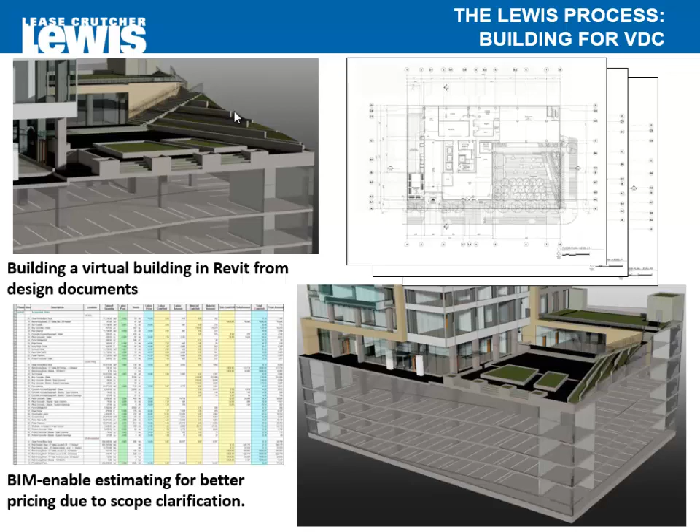But remodeling isn't lean. We don't want to have to remodel. So we want to engage the architect, and we want to engage the architect very early. I know you're all sitting out there going, oh, please, I don't want the contractor in talking to me in SD. Guess what? We really do want to be there early on. We want to be able to talk to you and say, hey, can we influence how you're going to model things? Because if we can influence how you model things, we have a collaborative environment right out the get-go. From that collaborative environment, maybe we can have you just draw your columns from floor to floor instead of from footing to roof. That makes a big difference for us in our quantities. So we ask, can you do that for us? It might be no, that's fine, but we're going to ask.

So the next thing that we do is, okay, you say no. Well then my next question to you is, can I embed my Revit schedules from Lewis in your model? Now what I'm going to do is ask for maybe 5 of these schedules. These schedules will have our shared parameters and Revit's parameters and calculated values that we find critical when we're putting our numbers together. That's why we want to work with you. And if you think about it, engaging us early doesn't hurt your process. And we're not taking over your process. I want to make that clear. We're simply working with you in that level of design development. So you're in 200, we want to work with you to get that up to 300. We want to work with you to bring that up into 400.

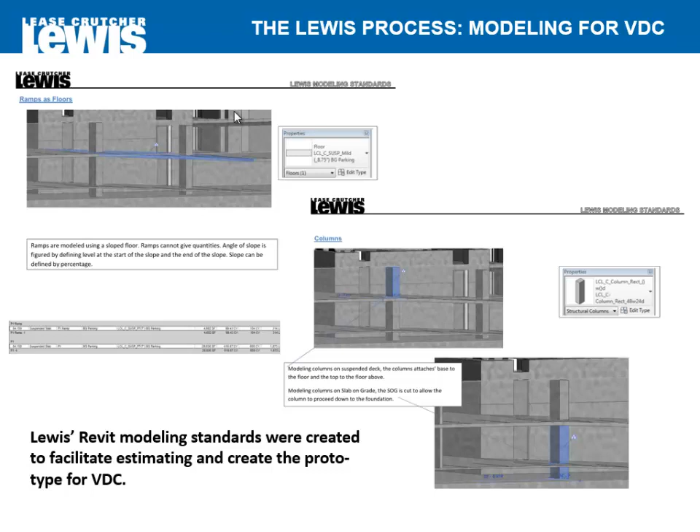And if you think about it, technically we've never built a building from construction documents. Anyone shocked from that comment? You shouldn't be. We build from the RFIs and the ASIs and the construction documents. So now the model, if it captures all that, you've got everything right there. So the next thing is, if you're not modeling, we model things that aren't even in our scope. Why would a contractor who does self-perform concrete work draw rebar? We find it critical that if we can put the rebar in there, we know it fits. We have better confidence that that element that we put in there is correct. We build it, we put the parametric parameters in there. So now we've got a template that we can either use for the next job or we can use as is further down the line.

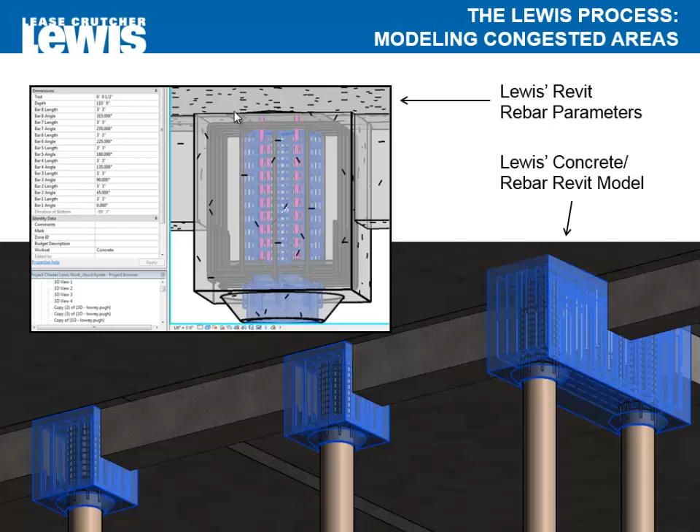So right now we talked about the architect's model, maybe a structural engineer's model. We definitely have a Lewis concrete model. So what happens is we're creating what's called the federated process, the federated model. You've heard that comment before. It's a master model that contains everything. And we do this for the points that you see up on the screen there.

We can vet those inaccuracies. We can find if something is outbound of a wall. We can find if the steel isn't what the steel's supposed to be. So this process to us is very important. And the most important aspect of it is that we capture all the ASIs, and you'll hear about BIM cons from the UW Bothell team, and the RFIs. And we're working with you as we're progressing the model.

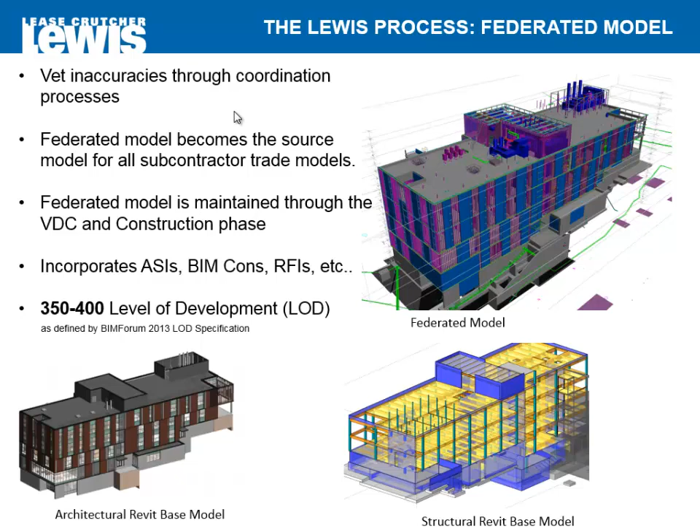So let me show you some examples of what I'm talking about for design assist, constructability review, and identifying conflicts. So this first one here, I guess you can read that. You can never tell when you're working on your station at work.

But we have here, we're still in design at this point, and we're looking at this, and all of a sudden someone realizes, wait a minute, the architect's model, the way it's designed, and the way the steel supplier has designed it, you can't get that duct supported. We're literally just not touching, so it's not supported at all. And we're not cantilevering, so we've got a problem. And that's simply for the architect.

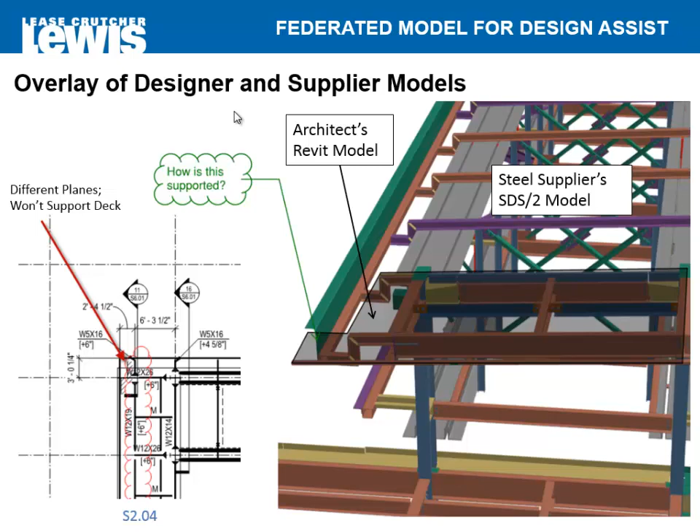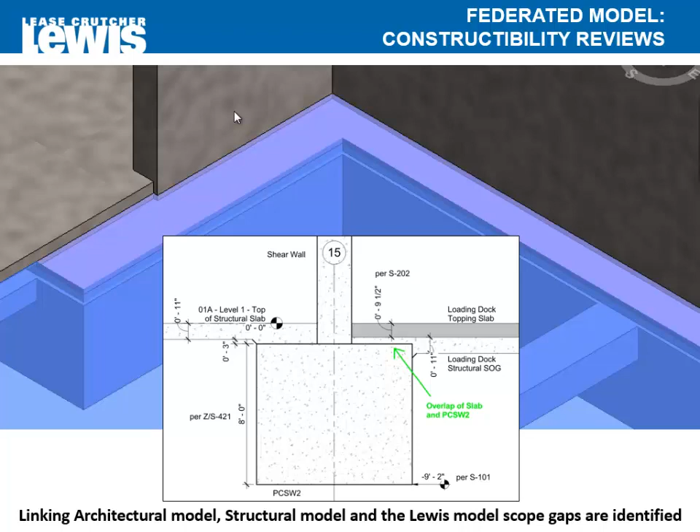The constructability review, again, as you see here, there's a dimensional issue that shows up that you might not have noticed, with the footing versus the slab for the dock. We see that, we've modeled it, we talked to you about it.

And then we can also, again, identify conflicts and identify them earlier. You see that we have the structural engineer's Revit model, and then we have our supplier's SDS/2 model. This is before we've gone out to the field. We're like, wait a minute, those two don't match. That's a problem. But if we find it now, instead of being out in the field, guess what?

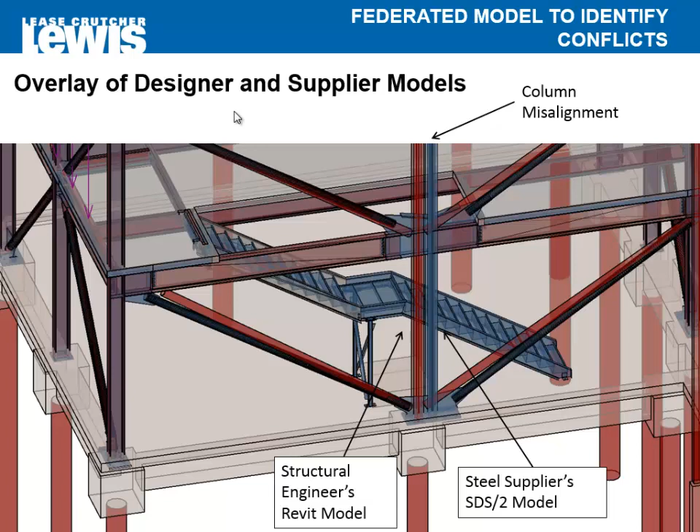We've got time. And that time allows us to come up with a better answer, not the answer that gets done right now, which is what's been happening in construction for a very long time, is you have to fix it, you've got to fix it now, however you can get it done. Now we can think about it. We have breathing room. So now when we get out there and we start building from the model, how are we actually going to be doing that process?

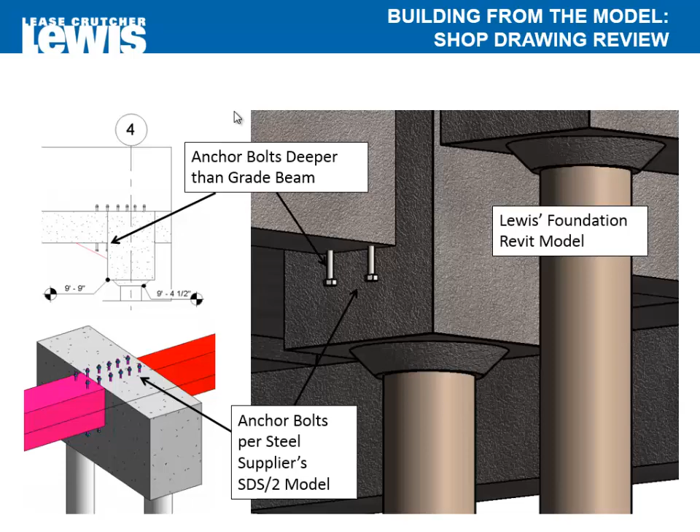So right now we have the shop drawing review inside of the model, a digital review. This is really the next step that we should all be doing. You see right here we have our grade beam, we have the anchor bolts coming in as the shop drawing is placed into the model, and it doesn't fit. We find it now versus finding it in the field. So we have the virtually constructed model. And it's a federated model now also.

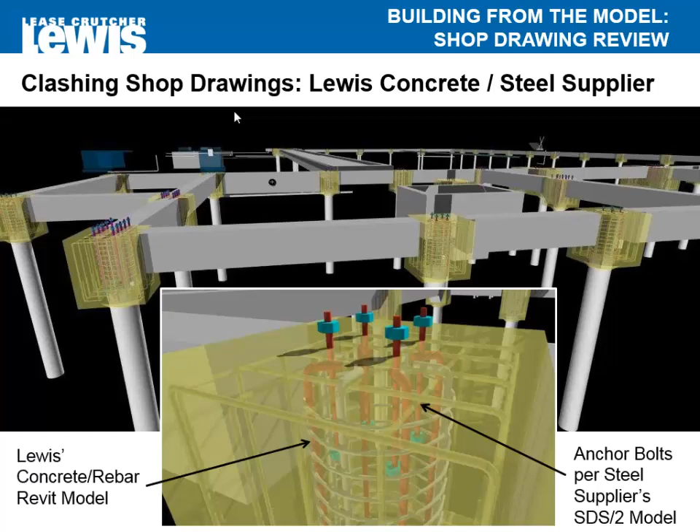You'll notice that we're doing shop drawing review. If we do shop drawing review before we clash, we actually end up with this condition. I've got anchor bolts interceding into my rebar. That's a bad condition. If we clash first and then have the shop drawings submitted, the review process we know is good because we've already clashed it, we've already seen it fits, and the shop drawings being made from that model, not on a dual process in 2D drawing somewhere else, means we have a better workflow. It's cleaner. It causes fewer headaches.

Another example that we did is we actually took another model, laid it over ours, cut the section, section for section, did the dimensioning right along line with it. This process might seem redundant, but it wasn't.

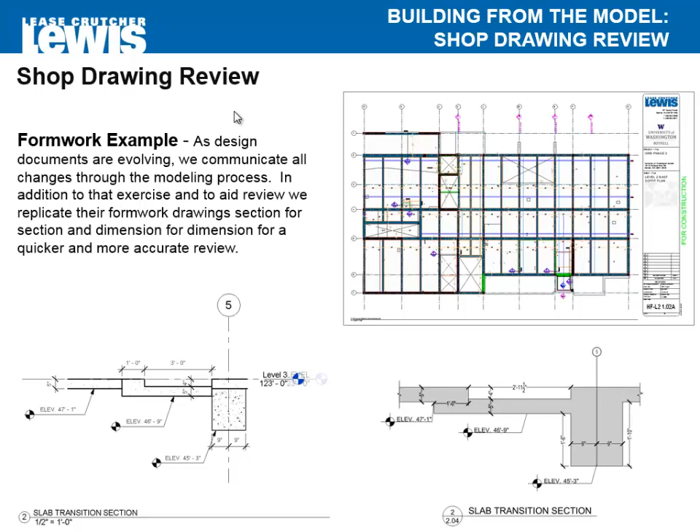We were reviewing, and it was actually more accurate, and it didn't take any more time. So now that we've done the shop drawings, and we've gone through and we've clashed and then done the shop drawings, we then want to do the field assembly. We literally now have a virtually constructed building. We got to get that out of the computer and onto the ground, in the dirt.

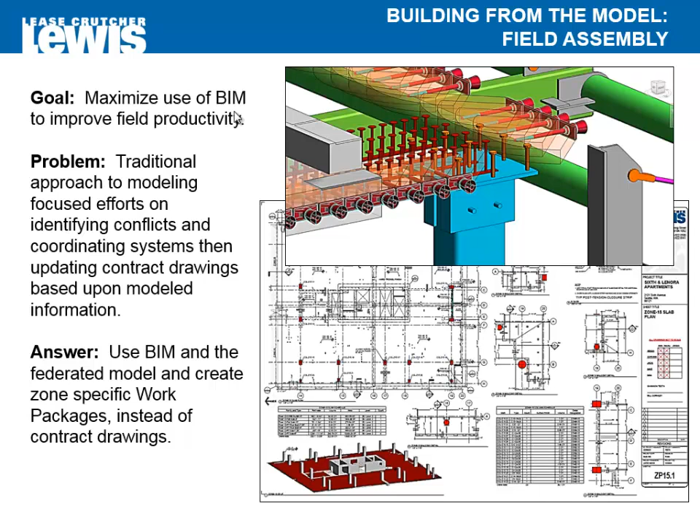So how do we maximize this BIM thing that we have? Well, we do that by creating work packages. The traditional process, as we talked about before, is fix the problem as fast as possible when it's found. Well, we've identified all these problems before we ever got to the field. So now we create what are called work packages, and we do these by zones. And what these work packages look like is literally everything needed for that zone is right there.

So we have the penetrations that we might need through there. We have all the PT heads for the slabs that might be needed there. We have the details that the guys in the field may have to go through 10 different sheets of paper to find the right detail. Those details live there. You also know the schedule. So we had a schedule in Precon, and now we've got a schedule out here in the field.

This schedule in the field, we've actually been able to quantify that this schedule, when we check the quantities of concrete and we order the trucks to come out, we've actually been able to order our trucks simply from the schedule we have here and not have an overrun or an underrun, had to call another truck back out. So that's why we trust our schedules. We know how much concrete that we need.

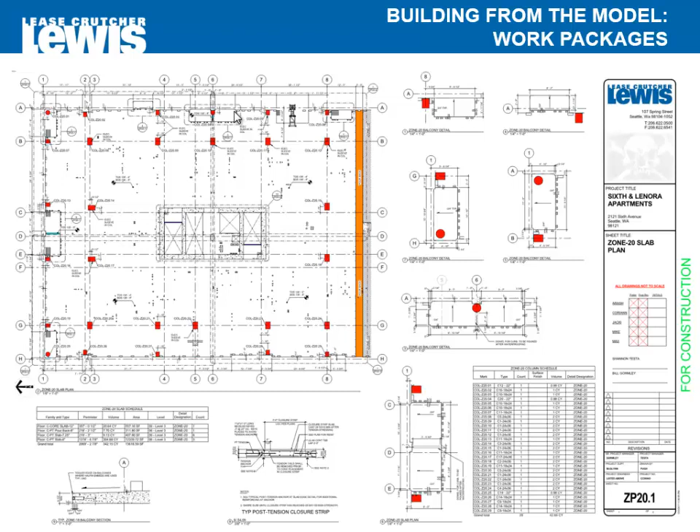So what we're going to do now is I'm going to hand this over to the UW Bothell team, which would be Alan Stewart, Dan Rooney, and Craig Stauffer. And these guys are going to talk to you about what we call the Lewis +1. This was what Lewis does, but now what are these guys going to do that make our process a little better, a little more efficient?

So Alan, you want this or you want that? No, I'll just stand.

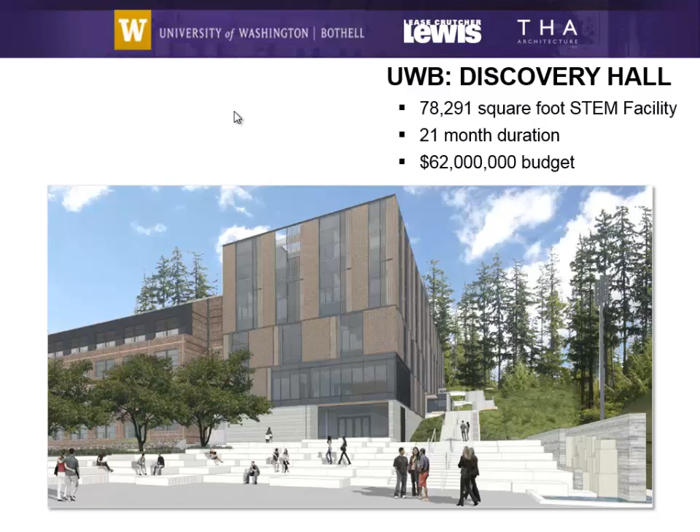All right, so as Lana said, my name is Alan. I'm the project engineer for Lease Crutcher Lewis for the UW B3 project. Basically, the job is a 78,000 square foot STEM building, so science, technology, engineering, mathematics. It had a 21-month duration, and it was a $62 million budget. And construction on this building actually started with 45% CDs based on the timeline the university gave us and their funding from the state.

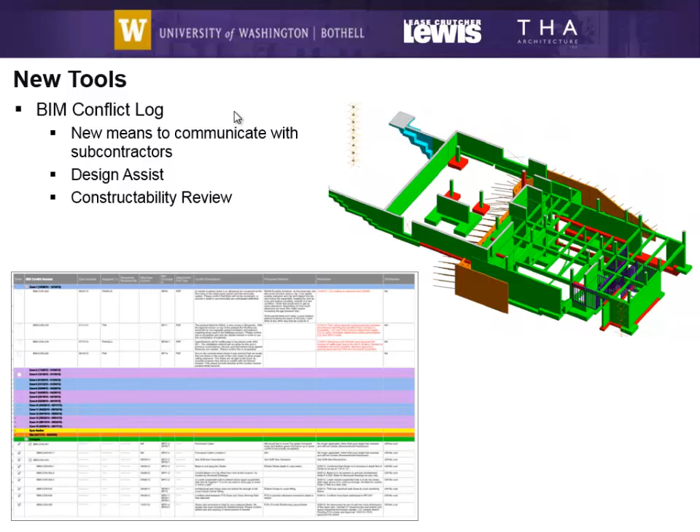So knowing that we're starting with the 45% CDs, we came up with a new tool. We called it the BIM Conflict Log. It's a new means to communicate with the subcontractors, offer our design assist, and provide constructability review all at the same time. Basically, the process originated as an internal process within Lewis that is something that we would do during pre-construction. And since this job started in pre-construction with actual footings on the ground, we thought it would be good to carry this through the construction on this project. It basically ended up replacing the RFI process.

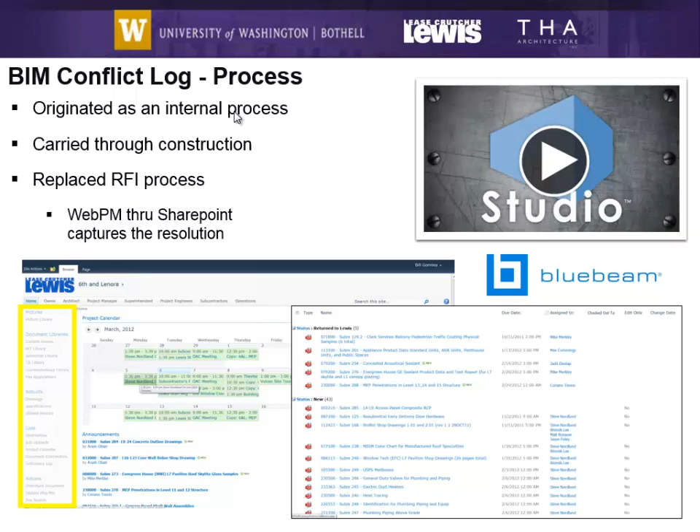We then posted it in Bluebeam. Again, I'll go over that here in a little bit, and also posted it to our WebPM log. Basically, WebPM is our internal SharePoint site, and we used it as a communication tool for the subcontractors, the owner, and design team. On a weekly basis, we had a collaborative working session where we had the subcontractors, the architect, any engineers needed, and actually in our case, we had the owner's architect and engineer involved also.

And then, during those sessions, the architect and engineer would confirm the issue would be closed, we'd post that back up to WebPM, notify all the subs, and then all those changes were then made to the individual contractor's model.

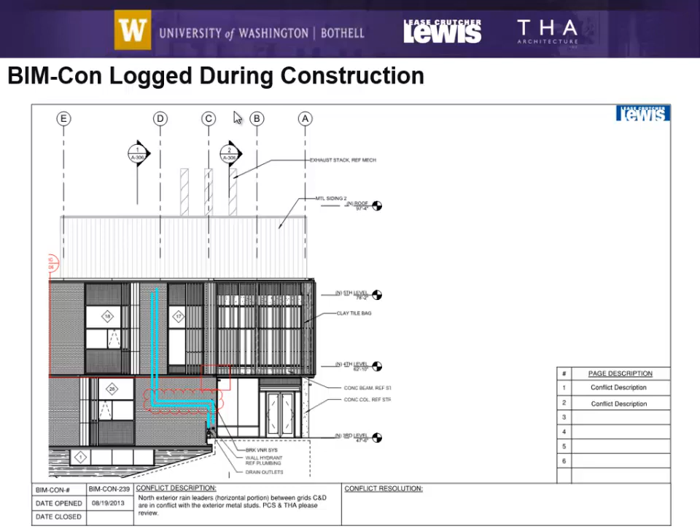So as an example, this is one we found when we were doing the MEP clash detection. We brought on our steel stud guy right after we hired the MEP guys, which is kind of unheard of. And here we found that our drain pipes were going to be crisscrossing the structural steel studs.

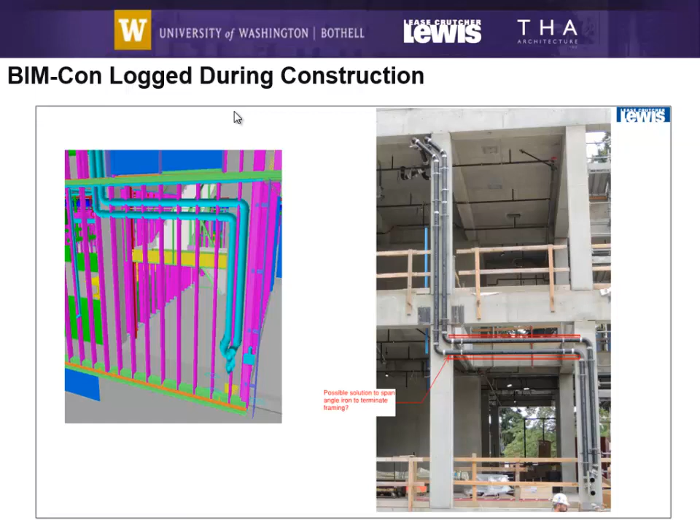Typically the photo on the right is where you'd find this conflict out in the field. The steel stud guy comes up, sees these drain lines, and now you've got an RFI. So these guys are sitting out there wasting time, money, and schedule waiting for an answer on what we're going to do about this conflict. But in the model, we were able to see that, yes, there was going to be a clash between the structural studs and the rain leaders.

We put everything into our Bluebeam Studio session and took all the details from the drawings and included them there. During one collaborative work session, everyone was able to come in and make their comments. We actually saw on this one that we were going to have a problem with the anchor details on the masonry also. On a normal job, you would have had an RFI on the pipe conflicting with the structural steel studs, and then a couple months later, another RFI on the masonry anchors.

So here, we were able to solve everything in one shot by taking a look at all the details and getting all the subcontractors involved. Our masonry sub was actually the one that came up with this. Everyone, while we were doing the session, was able to come in and add their comments, and we resolved it at that typical Wednesday meeting.

One of the reasons we decided to go with Bluebeam Studio is you can see that one comment has grayed-out nodes on it. Only the person making the comment can change that comment, so nobody else involved in the session can log in and make a change to it.

A lot of times we'll have the architect concerned about the integrity of the design and his comments on an RFI in electronic format. Well, this resolves that, since nobody else can make changes to their comments.

Yeah, so can we ask a question? Yeah. So this is a concern to me in architecture land.

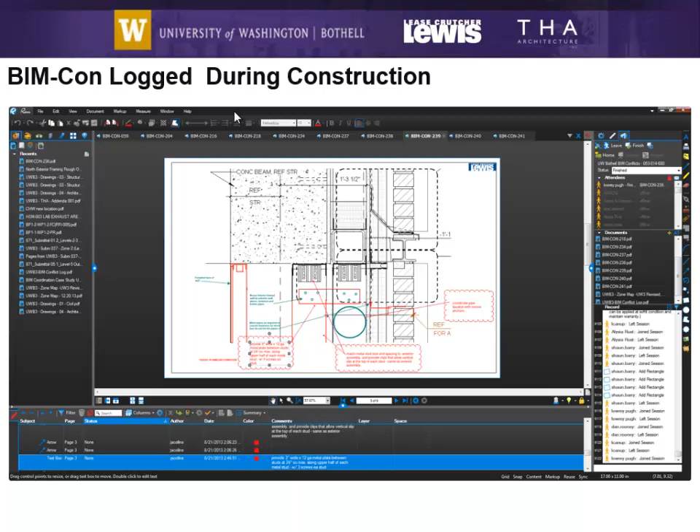The other thing Bluebeam Studio does, over on the right here, is a blown up shot. It actually records everything that happens within that studio session. So here you can see people logging in, logging out, making comments, adding rectangles. And after it gets up to about 3,000, we'll take this log and save it as a hard copy to our server, and we'll always have that record.

So if there's ever any question about what was the process on RFI 1, we can go back into our log and see kind of what the process was, and who was there. That's kind of our backup, like who was involved in the conversation that day, as you would normally see on an RFI.

Once we get the studio session set up, we actually send out an invite to the subcontractors, the owner's reps, the owner's architect, engineer, as I said earlier in our case, and the subs. You can see up here, this is kind of typical, we had four or five open BIM cons at a time. So we'd call up the subs involved in those BIM cons and have them log in remotely on the session.

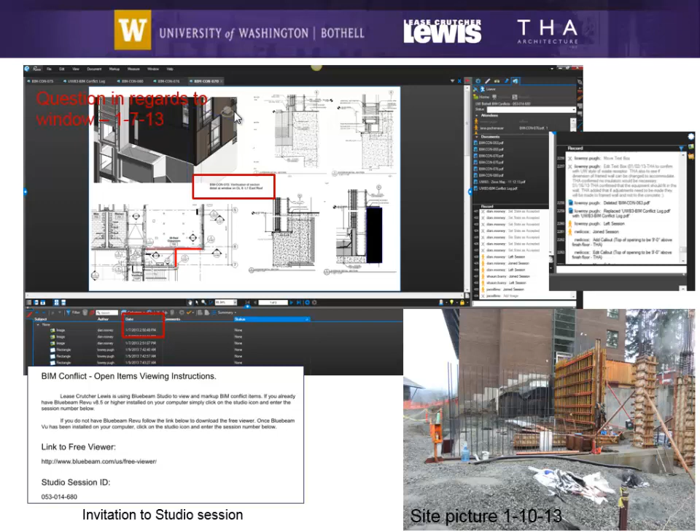So some of the main differences between a BIM con and an RFI: BIM cons encourage a collaborative approach. You're able to identify multiple issues, as I pointed out on an earlier slide, in one conflict. You're identifying things early, which gives the team the opportunity to find the best value solution. Early identification, typically weeks or even months earlier, limits your budget and schedule impact. As I'll get into when I talk about the ROI and metrics, a lot of the changes actually made during design ended up having no effect on our budgets.

With traditional RFIs, a majority of conflicts are noted while the work is being placed, which impacts not only your schedule, but each one of those questions now becomes a cost. Each RFI has an initial cost to generate and answer. Only one conflict is identified at a time. Sometimes you might catch another item that's affected, but in my experience you don't, and you end up having multiple RFIs in the same area. There's always pressure to answer quickly, limiting your typical response, or your best response possible.

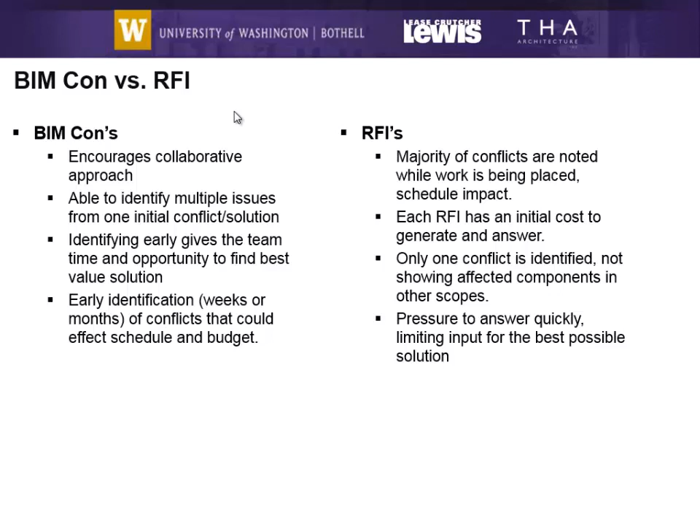So our architect had some of the reservations we typically see out of an architect, and he did this presentation with us. He wasn't able to make it today at the NWCCC, and he had a quote that I asked if we could use, and he said yes. Originally he had reservations about us using his model as a jumping off point for BIM coordination, but in the end he noted it resulted in a more comprehensive understanding of the entire project by everyone involved. He felt like he didn't lose control, but actually gained more control and had a better understanding of the job by allowing us to use his model.

So I'm going to now turn it over to Brian. Why don't we ask, see if they... Oh sorry, forgot it was a panel. Has anybody got any questions? I'm used to this being a presentation.

What kind of project delivery method was used for this project, I might have missed that? Is it design build? No, there's a GCCM, low bid, yeah, and ECCM. Yeah, it was a GCCM, ECCM, and an MCCM. Right.

Do you just inherit the architect's model and move it into your construction model, or do you work on the same model? We took their model and used it as an overlay, as a baseline.

I linked his model to mine and created a really detailed structural model. I had it off most of the time, but when there were questions or I needed information, I'd turn it on and see exactly what his intent was. I'd do the same with the structural engineer's model, and between the two I could figure out what they were both intending.

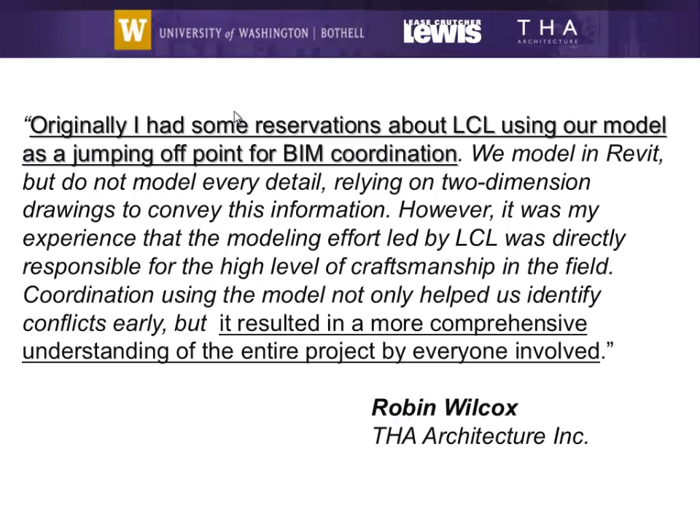I know UW Bothell wants the model and everything, but we also know that it'll get archived by PDF into the very elaborate system that UW has, but that's how you get the documents, so we will still be going back through. But for the most part, we kept track of that as the construction cycle was going, so it's not like we're getting a stack of 50 RFIs and now having to go back in and model them. We were making the changes as we went.

But I'll add one more piece, and you kind of touched on it, that where we saw the biggest advantage going through is that we always joke that if you had RFIs during design, that list would be incredibly overwhelming. We just don't refer to them as RFIs. In construction, it's kind of been turning the 3-letter word into the 4-letter word for quite a while. Now we've all got a lot more comfortable with what that means.

We still had RFIs. Every BIM con was probably 5 or 6 RFIs. The advantage is we were building it 3 weeks before the contractor was standing over it saying, this doesn't fit. So on site, we were incredibly impressed how smooth and quick. And I would bet the guys with the tool belts on doing the hard work every day felt everything went together great, not knowing that these guys still asked all the questions.

So it was very advantageous from that, and so much in the typical construction cycle, we're answering a question quickly so that we can keep things moving even though we know that's the wrong answer. Because yes, we can shift that, and when we shift that now, we can have it done in an hour, but it's gonna mess something up 3 weeks from now. But no one really cares about 3 weeks from now, they care about then.

In the BIM cons, we were able to encapsulate the fix so that we weren't messing stuff up later on, in a much more relaxed, no one breathing down the neck environment because no one has anything to do until we get an answer. So yeah, in our structure package, actually, we were putting footings in the ground right after the 45% of CDs were issued. And in a lot of cases, we were changing stuff on the first floor as columns were getting formed. So being able to build that in the virtual world first greatly helped out.

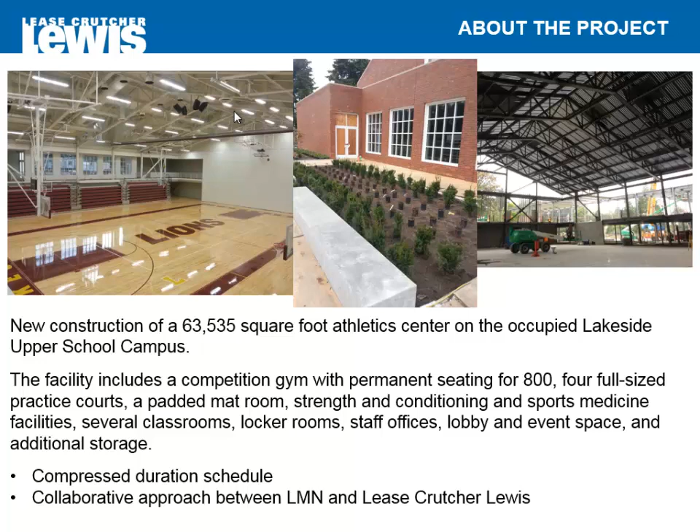Another big piece of this was we had a fantastic collaborative approach with LMN Architects and ourselves throughout the whole process, from conceptual estimating all the way to finished product. So we're featured in the DJC with some of our MEP partners and designers, about the approach and pre-planning, and it was a very nice article, I thought.

So Lana was talking about this +1 idea, and one thing we tried at Lakeside for the first time was virtual layout. It's a two-part process. The first part involves applying discrete points to elements within the model. So you can kind of see these. Do I have a cursor here? You see these? This number here, work package. So this was our work package 36, and this was the discrete number after it.

What that is, it's an actual point in the model. We assign key points to any place we want layout to happen. We export that from Revit into a CSV file, so it's simply an X, Y, and a Z. We embed that in the work package that goes out in the field. For this operation, we use tablets instead of paper drawings for the field, especially for the layout guys. And from that, they are able to take that CSV and upload it directly into a robotic total

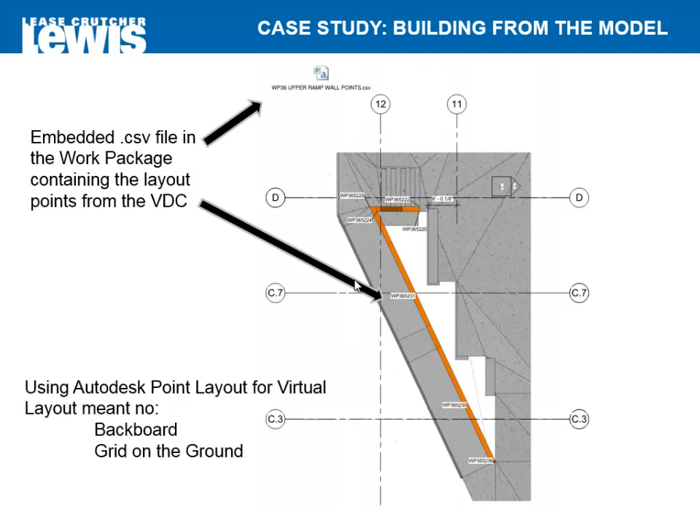station. So they have a sea of points in front of them where they can take the traveling end of that total station and walk out, and it tells them that's exactly where that point is. Then they do all their layout that way, and they don't need backer boards on the ground or to be pulling tapes and strings, and it's phenomenal to watch it happen. This is an example of a ramp and wall, and the layout that was done that way. That's this ramp wall right here.

We used it to support our subcontractors' layout as well. What we have here is an embed in a column, and this is a knife plate. These are the plates that get welded to it to carry the steel. We went into Revit and you could see them right here. This was the one to locate the embed itself, and this was the one to locate the knife plate. And when you push the model to Navis, those come through as well. It's just neat to see that.

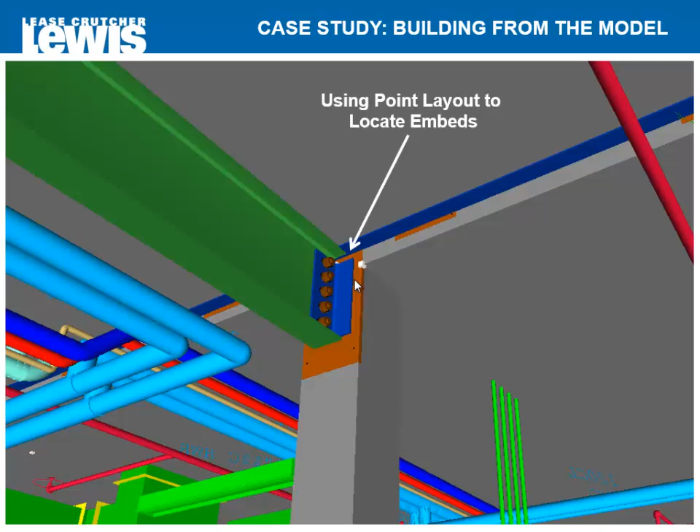Another example of using this tool: we had an existing berm in the back corner of the site, and we were trying to communicate with the civil engineer about how it looks now. The easiest way was we went out there, grabbed a bunch of points, created a CSV, brought them into Revit, and connected the dots. We exported that as a CAD background, and the civil engineer was able to move the lines around, and we were able to go to town on it.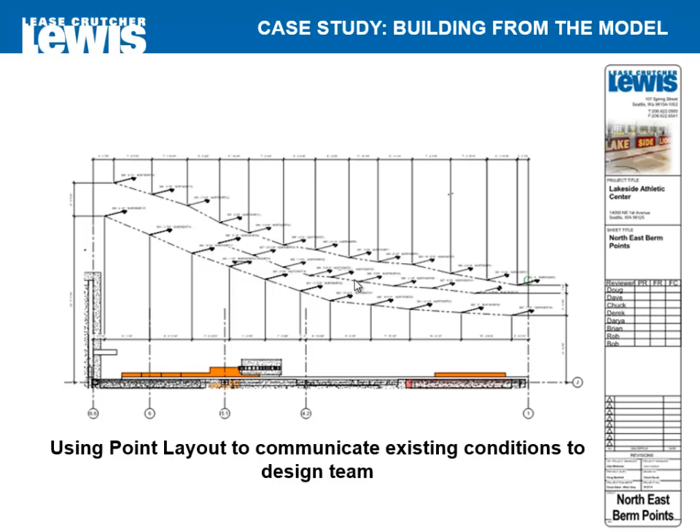This is another example. When we were flying these trusses in, we had our surveyor shoot in the peak. This is the competition gym. It's a pretty significant span, and we shot in the very tip of the steel member, brought that back into the model, and determined that we were less than 5/8 inch different than what the model intended, and that includes all the beam deflection, lots of variables. It was just neat to see as well. So that's all I have about Lakeside.

So, questions, or if Jeff would like to say anything?

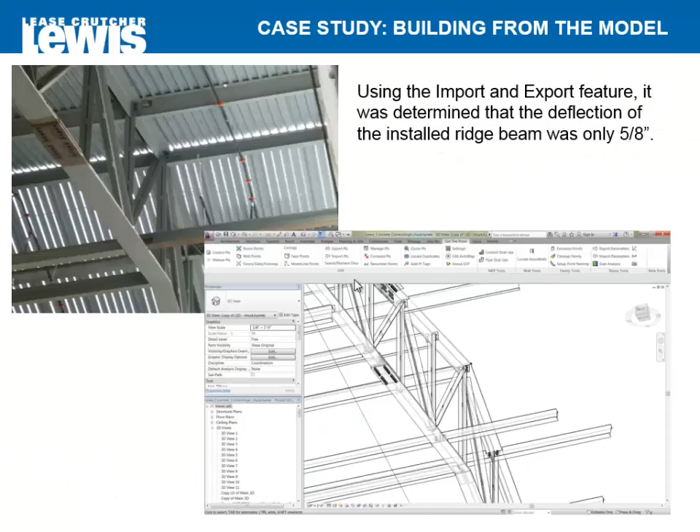Well, one thing that I would point out: you had the shot of the guy standing on the metal deck, and at that point in the project, they had asked us about, I think, two RFIs about layout where we had missed giving them a dimension. I got a call from Brian and he said, when you guys answer these, are you just going into your model and adding another dimension? I said, well, yeah, the model's the source, right? Yeah, so can we just use that?

And that's where we made the decision. We're totally comfortable with that because we have confidence in our model. So it not only saved them time in the field, it saved us the hassle of shuffling the paperwork of RFIs. Who knows how many dimensions we left out that would have been useful. Yeah, and this is how we laid out all of our walls. We supported our framing subcontractor in providing them with their layout, and it worked fantastically.

Are you guys using laser scanning for quality control measures? So we explored laser scanning, and our UW Bothell team used it for some of their work. But at Lakeside, we had a few instances where we considered doing it, but we were able to use this tool to extrapolate the same information, and it was readily available to us.

The only problem with laser scans is your point cloud is so large that it's almost impossible to differentiate items. So we actually ended up hiring another company, and he went in and used the total station and took points on actual elements in the building as opposed to doing the full scan, and it made a much more manageable file than doing a full laser scan.

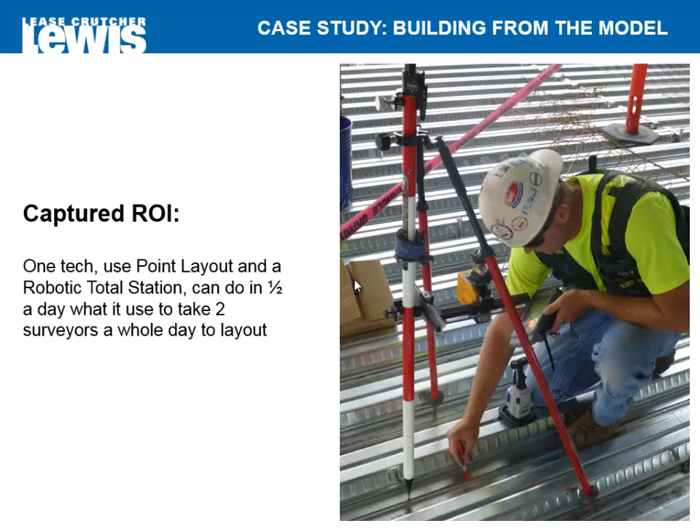There was another question that came up earlier, I think Rob was asking it, about the architectural intent that's not modeled. It was made very clear that the model is not the contract on Lakeside. I don't know what you did on Bothell, but the two-dimensional drawings are the contract. Right. And it was understood that nobody is going to, at least during design, get into the gnat's behind on modeling this stuff. It'd be a waste of time.

It was the same way on the Bothell project. The 2D drawings were the contract documents, and the model is just something that everyone kind of accepted as being, this is what we're going to build to, but at the same time it's going to relate back to what those contract drawings say. Yeah, and every work package that goes out the door, it's not like we just take cuts out of the model and go. They're constantly vetted with the contract documents to make sure they match. And if they don't match, then a BIM Com or an RFI is written to capture that difference somehow.

And having multiple different models all brought together, you can easily see if somebody made a mistake. So if Dan raised the floor up 2 feet for some reason, then the drywall contractor would come and be like, hey, how come your wall's 2 feet in the air here? Oh, well, I just missed a digit. So there's a lot of back checking in that aspect also when you bring multiple different models together.

So I'm going to talk to you a little bit about the ROI and the metrics on the UW-B3 project. The owner was very interested to see their return on investment for going with 100% BIM coordination. Some of the challenges we had: we had an accelerated schedule.

We were building from 45% documents, as I said a little bit ago. The BIM process requires a level of collaboration we've kind of touched on, whereas traditional construction communication is I lob a question over the fence and wait 7 days to 2 weeks to get an answer back.

With our schedule, we just didn't have that kind of timeline. A lot of times we had questions answered the same day. And then we needed to concentrate on selecting subcontractors who can perform in this environment, while also guiding some of our smaller tier subs through the BIM process.

In no case did any of our subs balk at doing the BIM when they saw it in their bid packages. We did have one sub come to us after he bid and say, I'll tell you the truth, we don't have a BIM department, but can you help me? And we not only helped him with the software, we helped him get his whole BIM department started.

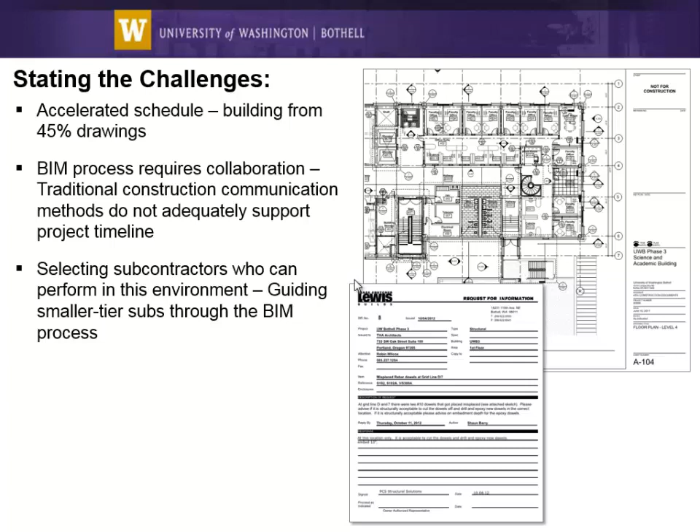So one of the things the university wanted to look at was the structure. They're typically used to seeing a lot of overtime to get structure change orders back on schedule so the MEP guys can get in and get everything placed. They took a look at 3 of their current projects as well as ours.

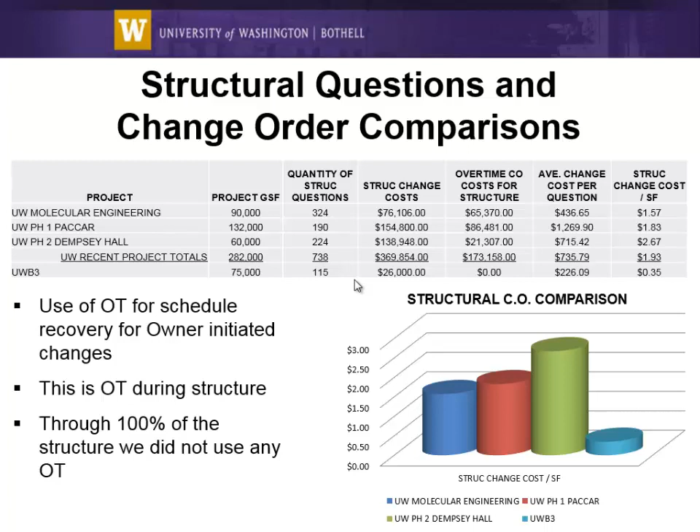The use of overtime on our job, we actually had 0 overtime for change orders, which you can see from the graphic, compared to most of their jobs where they're used to seeing, in talking square footage, upwards of an average of $2 per square foot in just construction change orders. And that's through 100% of the structure.

So risk contingency: the university typically allows 2 to 2.5% of the contract value, and they use that for buyout errors, coordination issues, and interferences between different subcontractors. On our job, we've used 0, and we're about 95 to 98% complete.

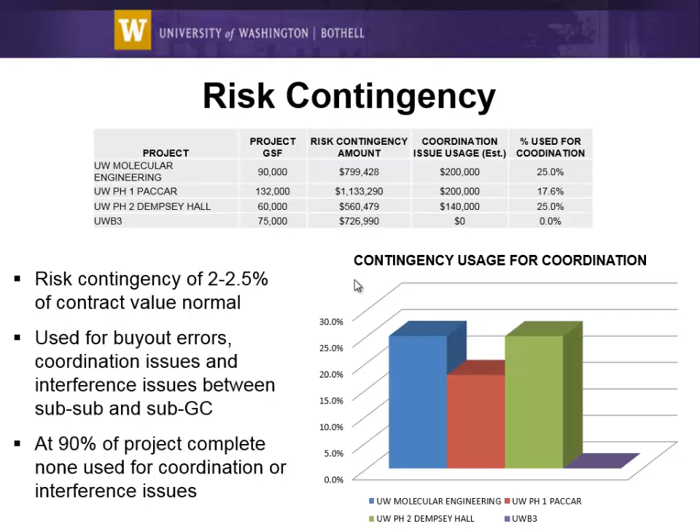One of the biggest ones is the 3rd and 4th floor, we ended up adding 6 offices, and that was the day before we were going to lay carpet, so we were fairly complete on both those floors. A lot of the charges on that were actually related to expediting doors.

And so, like I said earlier, the university wanted to see does our BIM investment pay off. Strictly looking at the structure package, when we're done with the MEP we'll take a look at those also, but right now we're 100% done on the structure package.

The university is basically seeing a 158% return on their investment, and that's based on the 3 current jobs with an average cost per change per square foot around $2. So they got a pretty good return on their investment.

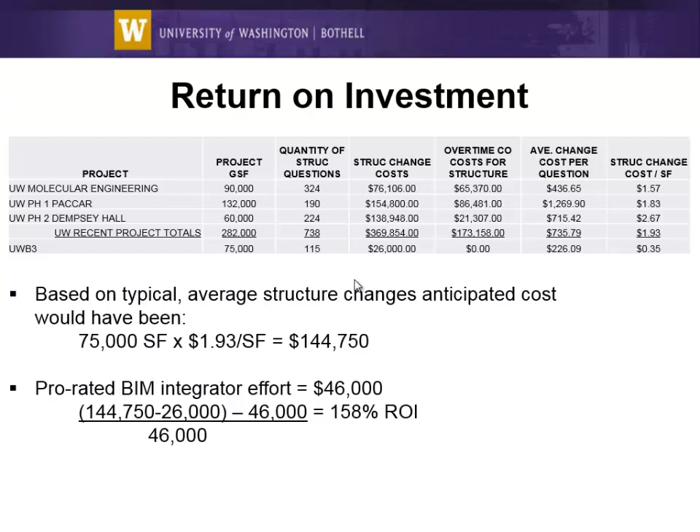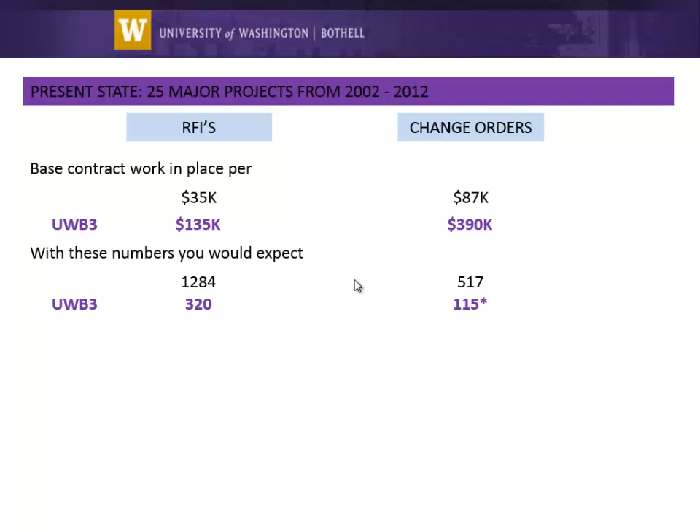So basically the future state, UW-Bothell is a great example of that. We have roughly 75% fewer questions, 78% fewer change orders. We got a better quality of work in place, virtually no field fixes, and higher worker morale and better productivity.

What it came down to is everybody out in the field didn't want to be that one guy that caused the problem. So he wanted to make sure that he installed it as the model showed it. Because of that, this is probably one of the smoothest jobs in the field I've ever worked on.

All right, so that concludes that. Any questions?

I think we've luckily had a pretty lively conversation throughout, so we probably have time for 1 or 2 more questions, but I think that we raised a lot more questions than we're going to answer.